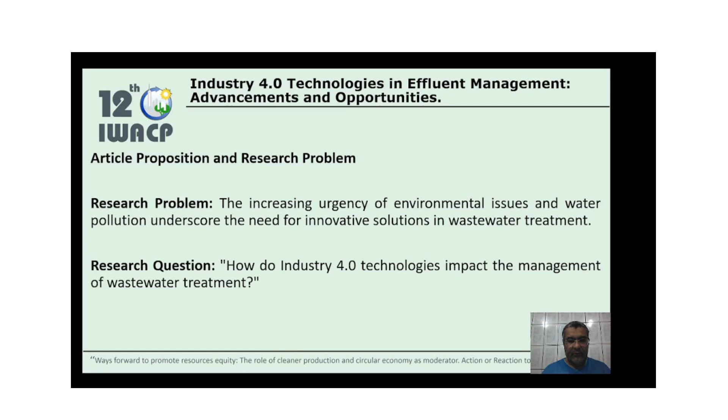Water is life, and treating effluents can eliminate or reduce excess heavy metals, nutrients, and pathogenic organisms, guaranteeing conditions for the reuse of this water. This process is carried out by a number of companies and is vital for minimizing negative impacts and ensuring water sustainability. Effluent treatment plants play a crucial role in this process,

which is continuous, uninterrupted.

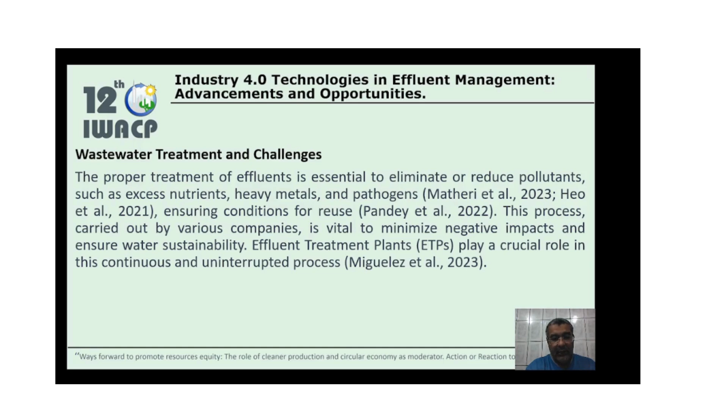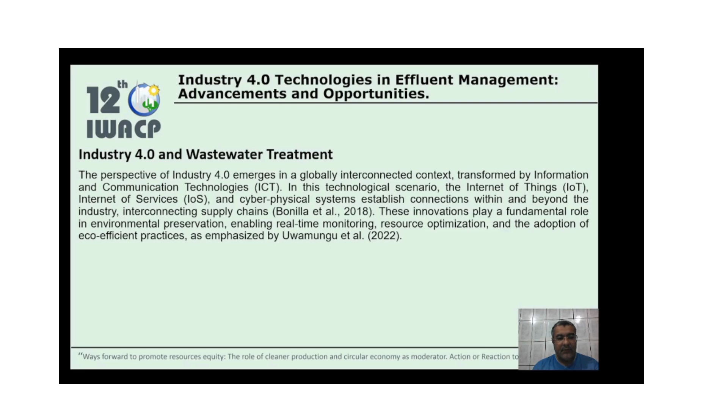The Industry 4.0 perspective emerges in a globally interconnected context, transformed by information and communication technologies. In this technological scenario, the Internet of Things, the Internet of Services, and cyber-physical systems create connections inside and outside industry, interconnecting supply chains. These innovations play a key role in environmental preservation, making it possible to monitor in real time, optimize resources, and adopt eco-efficient practices.

A systematic literature review is a methodological approach that uses predefined and rigorous criteria to identify, analyze, and synthesize existing research on a specific topic. The aim is to gather all the relevant evidence available in the literature to address a research question.

Our systematic literature review was carried out using the Scopus and Web of Science databases, with the search string Wastewater and Industry 4.0. The protocol adopted was Okoli's, and consists of 4 stages.

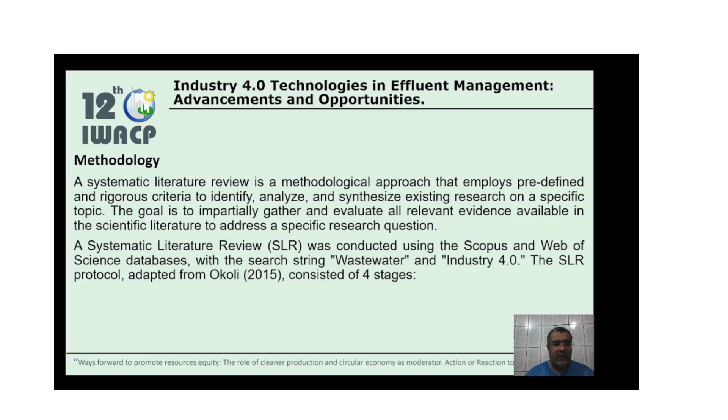The 4 steps used to draw up the protocol: the identification of the topic and the research question were the starting point for drawing up the research protocol.

Stage number 2, selection, in which the practical screening took place, defining the search criteria, including the databases. The literature search took place in Scopus and Web of Science with the string Wastewater and Industry 4.0.

41 articles were retrieved from Scopus and 24 from Web of Science, for a total of 65 articles. Of these 65 articles, 22 were duplicates, resulting in 43 total articles.

Of these 43 articles, we excluded some, leaving 38 articles. In stage 3, we extracted the data and analyzed and evaluated the articles based on the research question.

Looking at it from this perspective, we saw that 21 of the articles had a different focus from the research question, leaving 17 articles. Stage 4 was the execution stage, in which the synthesis of these articles was carried out.

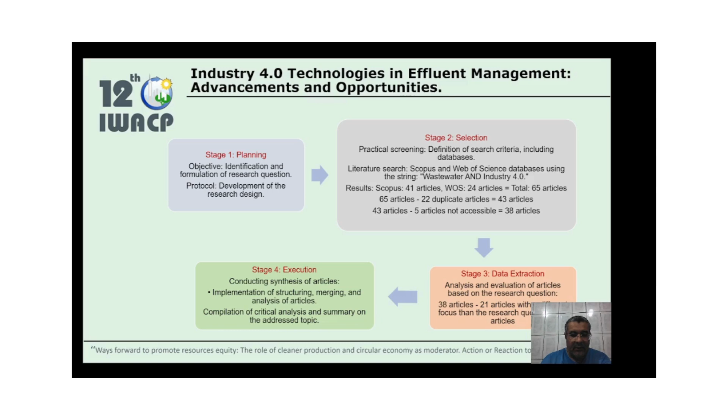The analysis of the 17 articles resulted in the table shown here, in which an analysis is made of the theme and focus of each of the articles used.

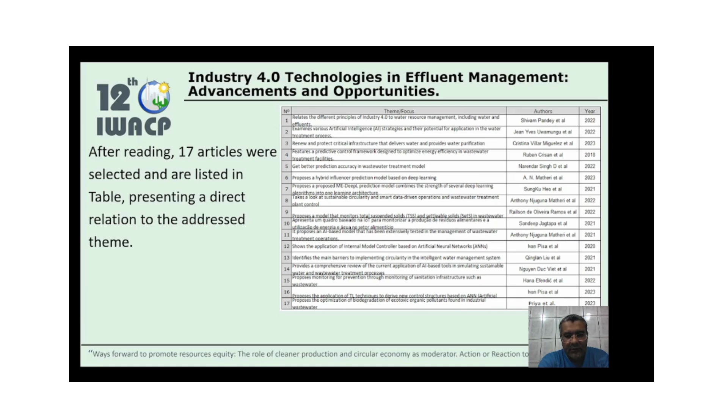The data obtained from Scopus and Web of Science was analyzed using VOSviewer software, which generated this image, which we divided into 4 clusters, in which each one highlights terms that appear more frequently.

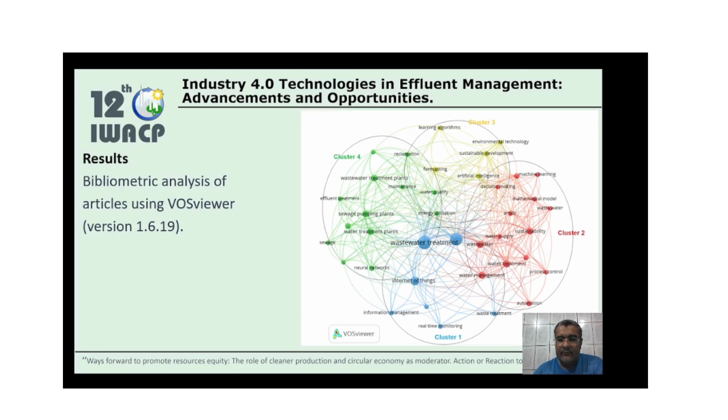In this first cluster, we explored the convergence between the Internet of Things and real-time monitoring in effluent treatment. The authors Pandey et al. highlight the versatility of IoT systems, performing crucial functions from collecting data on wastewater to remote monitoring of water quality in post-treatment.

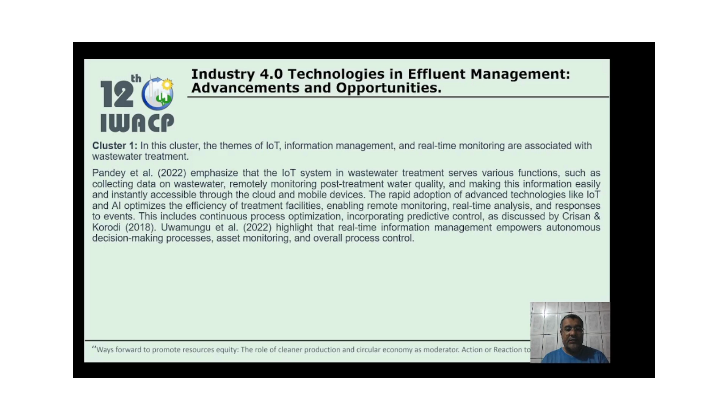The adoption of these advanced technologies, combined with artificial intelligence, not only optimizes the efficiency of treatment facilities, but also enables remote monitoring and real-time analysis, as well as artificial intelligence. The second cluster focuses on the role of machine learning, process control, and automation in the wastewater treatment scenario.

Matheri et al. suggest applying machine learning algorithms to identify subtle contaminants, providing regulatory compliance and environmental safety. Also noteworthy is the automation emphasized by Pandey et al., which is leading the way by enabling the elimination of dangerous conditions and a proactive approach to reducing operating costs.

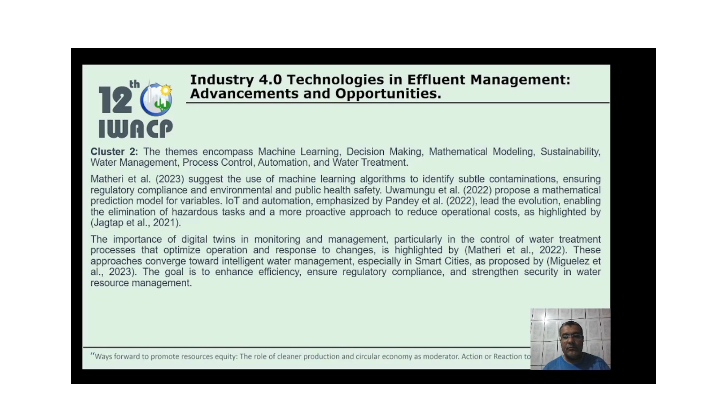The third cluster focuses on the relationship between learning algorithms, sustainability, and environmental technologies. Pisa et al. present evidence of the solid performance of prediction and control networks, while Liu et al. point out that the combination of the Internet of Things and big data offer promising prospects for improving environmental management and promoting sustainability.

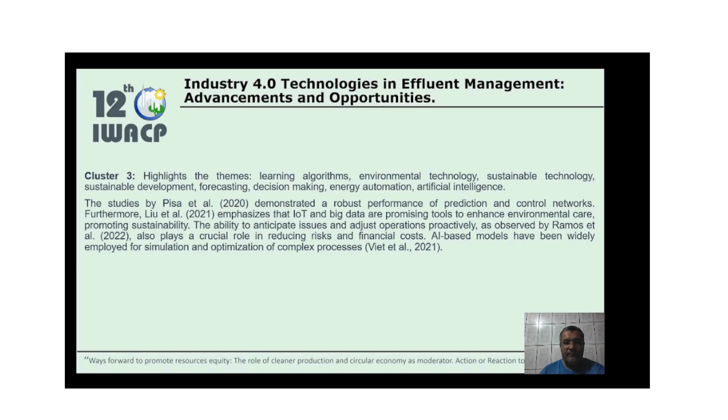In the fourth and final cluster, we explore themes related to water recovery and water quality. Liu et al. highlight the advances in recovery technologies, making it possible to produce water of various qualities, suitable for drinking and non-potable uses.

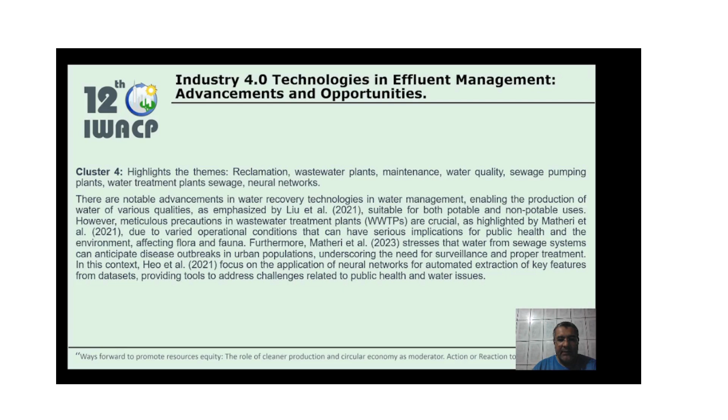However, Matheri et al. warn of the need for strict precautions in wastewater treatment plants, given the variety of operating conditions that can impact public health and the environment.

In conclusion, we state that the convergence of Industry 4.0's enabling technologies and effluent treatment offers substantial improvements, from improved operational efficiency up to a higher quality of treated water.

Authors such as Effendik et al. point out that these technologies enable informed and effective decision-making, promoting environmental preservation. However, there are challenges to be faced, such as technological integration, regulatory compliance, and organizational adjustments. In a global scenario of increasing water scarcity, the recycling of effluent water is gaining relevance, highlighting even more the role of Industry 4.0.